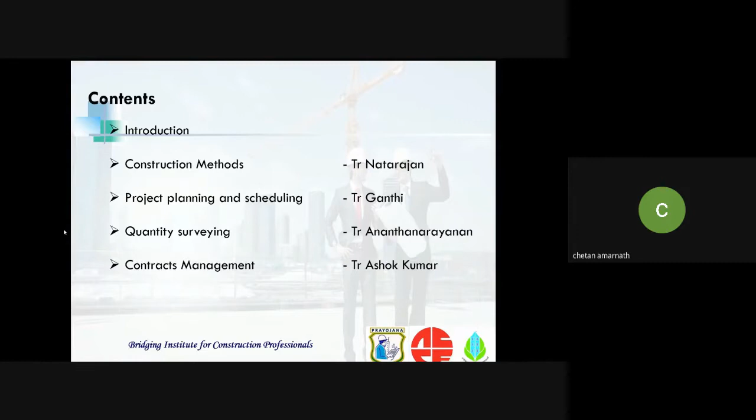And also contracts management, which is often ignored by students because they think it is a quite complicated topic. But our Ashok sir made it very easy for us to understand and apply when we enter into the construction industry.

We also had around 25 webinars, all from people who have experience in the construction industry for a long time. We covered some of the most important and also most ignored topics, from waterproofing, quantity surveying, airport construction, and more. We got a lot to learn from these webinars.

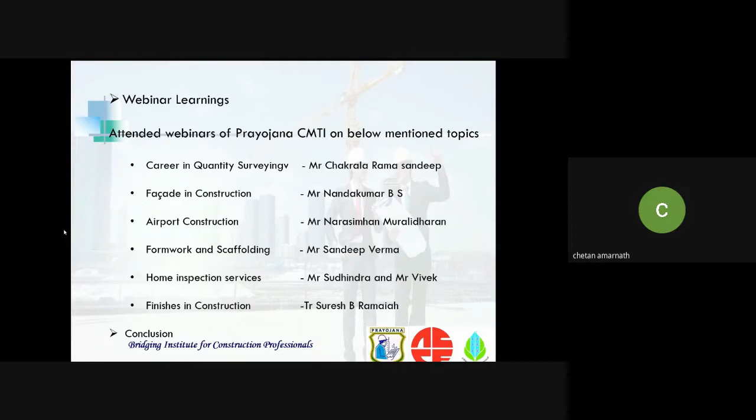So let us start off with the introduction. Construction management is the process of planning, coordinating, monitoring, and controlling of a construction project. This style of project management is especially designed for the construction industry.

So many people ask, why construction management? Why is it so booming in the industry right now? Why are so many people talking about it? Construction management is necessary because it involves all the small details that are often ignored by many people, and those small details make the difference in how successful a project is or how much profit has been made.

All the small details are included in this, right from the schedule, the budget, whether everything is falling according to plan, or if there is any lack in the steps or activities. All these are taken care of by construction management.

Soft skills are also very important for a construction manager, which ensure effective communication between all the teams in a construction project. We know that there are at least 5 to 10 different teams working on a construction site, so there has to be effective communication between each party.

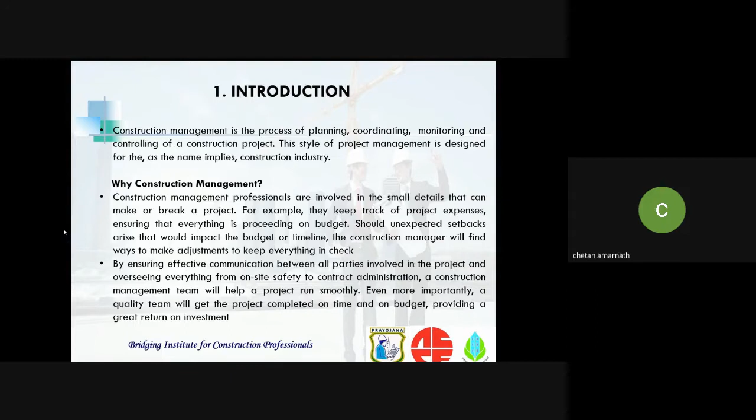If there is any communication gap, it might lead to destroying the work and redoing it again, which is a waste of time and money. So to avoid that, construction managers make sure that communication between all the parties is smooth and up to date.

So, the scope of construction management in India. As we know, India wants to be a $5 trillion economy by 2025. For that to happen, the construction industry has a very important role, because it is one of the most contributing sectors in India, growing by 7 to 8% every year.

It is estimated that by 2025, the size of the construction industry in India will be the third largest in the world, almost 1 trillion US dollars. With this construction industry expanding at such a rapid rate, there is obviously a dire need for better construction managers and project managers who will ensure the project is completed on time within the stipulated resources and budget.

That is why I realized that construction management is so important for every civil engineer to learn, and I got this wonderful opportunity to join Prayojana Construction Management Institute.

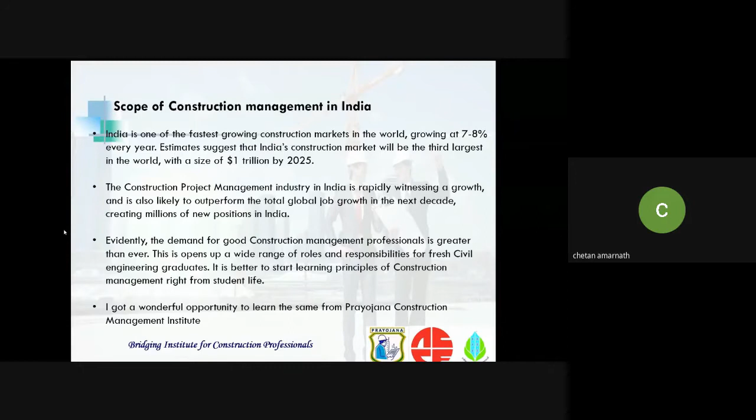So one of the first classes that we started with was construction methods. Even though it says construction manager, it is very important for a construction manager to know all the technical aspects, because construction management is all about balancing between the technical aspects and the management aspects of a project.

So to know the technical aspects, we had these many classes which spoke about the construction steps involved right from pre-construction. Basically, the construction project is divided into three major categories: pre-construction, the actual construction stage, and post-construction. As a student, I never knew there were so many activities involved before the construction of the project.

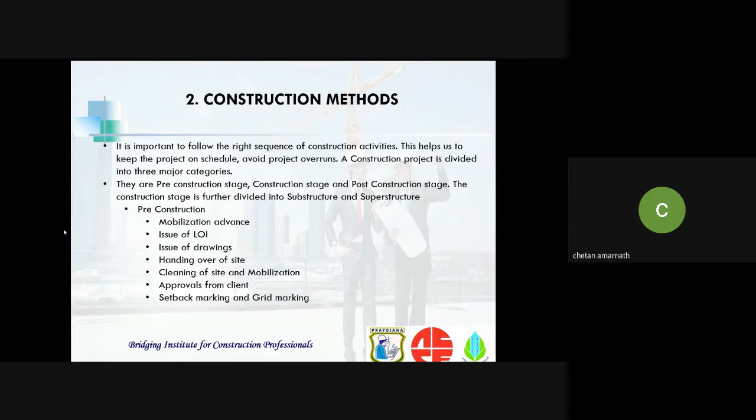Right from mobilization advance, the issue of letter of intent, the drawings, then cleaning of the site, handing over, and marking, and then we move on to the construction stage, where it is further subdivided into substructure and superstructure. Many important activities like excavation, filling, anti-termite treatment, PCC, backfilling, shuttering, and concrete work all happen in the construction stage in the substructure.

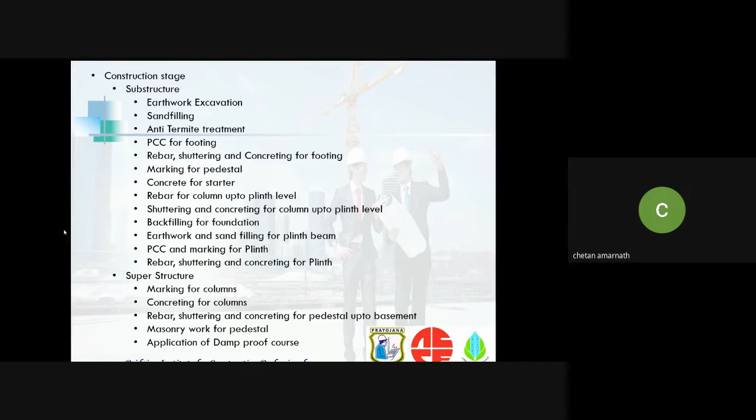Superstructure is almost similar, just that there will be no footing works. We carry on with the columns again, then rebar, shuttering, and concreting for the other RCC elements. Then we put the rebar for the ground floor slab, and we do slab level checks and electrical conduits, all those things.

And then one of the most important parts, which supplements the other construction activities, is the finishing. People who are buying homes don't care if the beam or column is built properly. They only care about the finishing, how good the home looks, how good the project looks. So finishing is the most important part.

It involves the brickwork, plastering, scaffolding, the wall chasing for electrical conduits, the internal wall plastering, and the waterproofing, which makes sure that water does not percolate into the building. So these are all important parts.

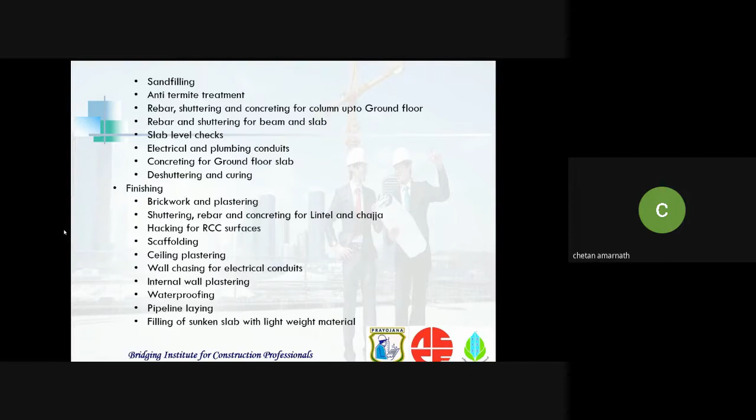Also the flooring and finishes, where we take care of removing the dead mortar, kitchen wall tiling, room floor tiling, all those things. And then external works, which involves electrical pumping, car parking systems, and rainwater harvesting systems, which is compulsory for every project right now. And then the external painting, and then we hand over the site to the client.

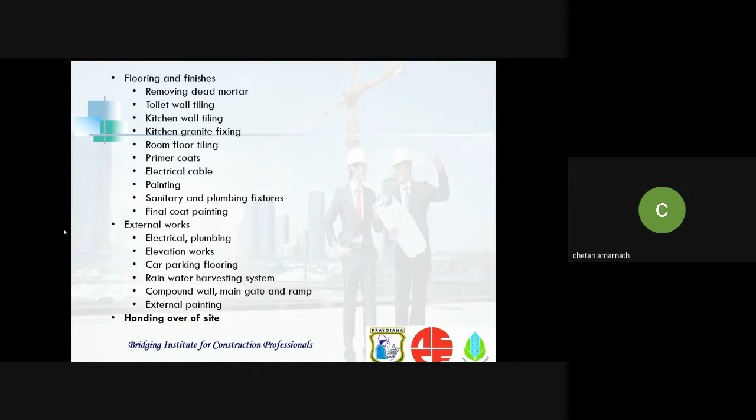So that was a brief introduction about construction steps. There are many more detailed steps involved, which have to be learned in a very extensive way by a construction manager.

Then we learned about project planning and scheduling. This might seem like a very simple and common topic, but the amount of detail involved in project planning and scheduling is immense. Planning is basically defining a process of what we are going to do in the project in a systematic way.

That process will include all the resources that we have, the time that we are going to spend, and the cost which is given, the budget. Planning can be either done manually or by the use of project management software. Basically planning is divided into three parts: time planning, resource planning, and cost planning.

Time planning, it's obvious, involves the timeline where the work or activities are broken down, and it is to be executed in a sequential manner within the given time.

Resource planning deals with the allocation of available resources to the activities, so that it is allocated in the most feasible and productive way, so that no labor is just wandering around the project without any work. They have to be allocated in such a way that everybody is working all the time in the most productive way.

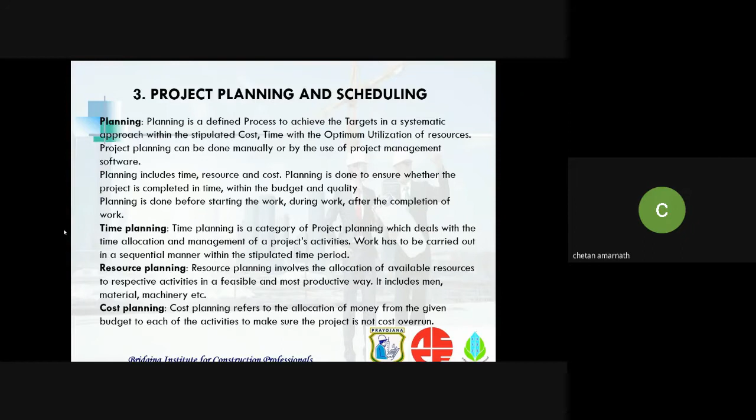The cost planning refers to the allocation of money from the given budget to each of the activities, to make sure that the project is not exceeding the budget and that all activities are taking place within the stipulated cost. So what is the need for project planning?

Project planning ensures that the project is completed with utmost quality, without any errors, without any fault. It also has to be completed within the time. It is not okay if the project is delayed by 2 or 3 years while delivering high quality. Customers don't care about the quality if the project is delayed by 1, 2, or 3 years.

So the project planning ensures that it is with high quality and also within the stipulated time, also within the budget cost. Customers don't prefer spending a lot of money just so they can get a high quality project. It also should be within the budget.

So we move on to the next topic, that is scheduling. Scheduling is a mechanism to communicate what tasks have to be executed, and we allocate the resources and the time frame as well. So scheduling takes care of which task is to be done, when, and within what time. It has a great deal of importance as it takes care of allocation of resources, time, and all those things.

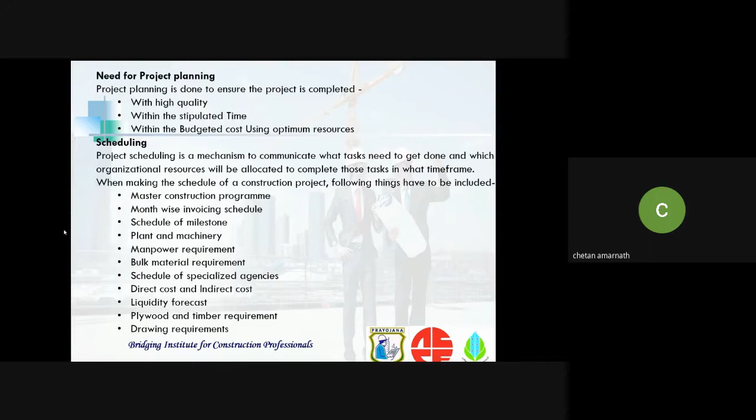So project scheduling is basically most widely done by Microsoft Project. It is a wonderful application, software developed by Microsoft. It is designed to assist a manager in developing a schedule that is used to assign the resources. It is also used to track the progress, manage the budget, and analyze the workloads, everything.

So the basic steps that are to be followed in any project scheduling are given below. We have to first create a project, then we create the project calendar, where we give the work timings, whether it is 5 days a week or 6 days a week, and then all the holidays that we are including in the calendar.

We also give the input of the project information, that is when we are starting, what is the deadline, all those things. Then we modify the time according to our requirements, entering the sequence of activities, then mentioning the predecessors, successors, all those things, then identifying the critical path and the total float/slack. So this is how a typical MS Project schedule would look like.

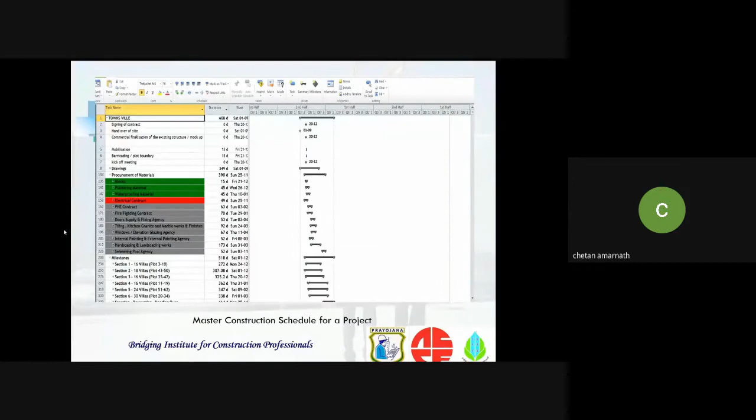So then we move on to the next very important topic, that is quantity surveying. Quantity surveying these days is gaining a lot of importance in the construction industry. It mainly deals with estimation, planning, and control of cost of construction projects. It includes very important topics like value engineering, feasibility studies, cost planning, etc.

The roles of a quantity surveyor are never ending, so the list goes on. The most important and main roles are mentioned here: the estimation of quantities as per the tender drawings, the review of bill of quantities received from consultants, then studying the good-for-construction drawings and preparing the pre-estimation of quantities.

The quantity surveyor is also required to audit the bill, but not to certify the bill. Certification is the responsibility of the respective project teams. Coordination with the project team, procurement team, and coordinator—communication is very important. The quantity surveyor is also required to audit the final bill. So these are some of the responsibilities that a quantity surveyor is assigned with.

So it is safe to say that a person or professional who wants to pursue a career in quantity surveying should be perfect with the bill of quantities, contracts management, then technical aspects such as studying the drawings, and also the latest trends of prices of the material, so that they don't get cheated by these small vendors.

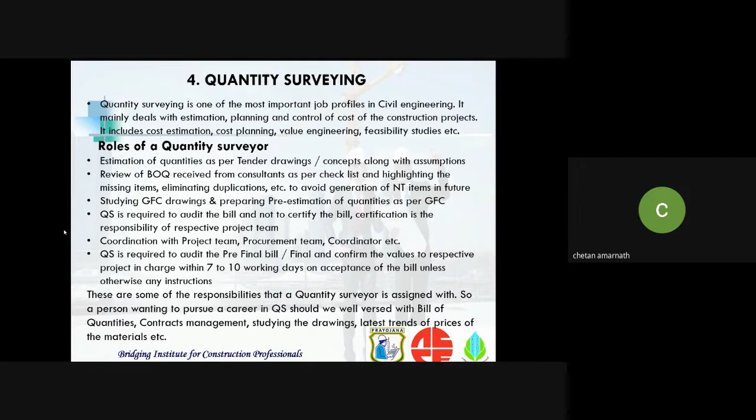So then we move on to contracts management. As I said, many students or budding civil engineers tend to avoid this topic because it seems complicated, but it is very important and an excellent topic to know.

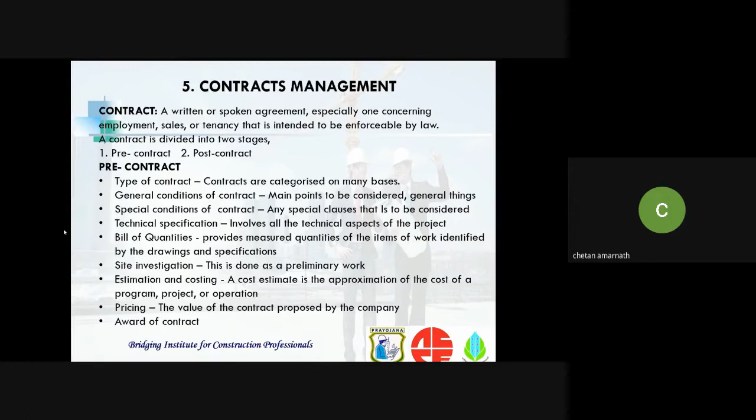A contract is basically divided into two stages, that is pre-contract and post-contract. The pre-contract involves the types of contract, the general conditions that are involved, the main points to be considered, the special conditions, any special clauses that the company should know, the technical specifications, the bill of quantities, site investigation, estimation and costing, and award of contract. So these are all the activities that are involved in pre-contract.

Coming to post-contract, post-contract involves letter of intent, that outlines the understanding between two or more parties, and the letter of acceptance, which is basically a document that is issued after the agreement of the project. Then the work order, which is an order issued for a definite scope of work to be performed, pursuant to a job order contract.

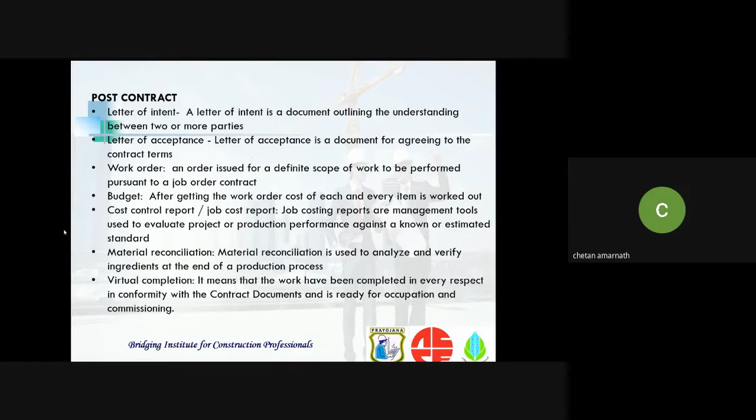So after getting the work order, the cost of each and every item is worked out, and the budget is framed, which is to be followed. And the material reconciliation and the virtual completion. Virtual completion basically means that the work has been completed in every aspect, that is conforming to the contract documents, and it is ready for occupation and commissioning.

So these are all the things that are involved in post contract.

Coming to types of contract, we have many categories or types of contract. The most common or popular type is item rate. An item rate contract is undertaken on a per piece or item basis, where the contractor works and gets paid per item. The quote rate is based on the quantity manufactured or work done by them.

We also have another type called lump sum or fixed rate. It is a type where construction related activities are regulated with a fixed price decided before the project starts. Essentially, if the lump sum contract was signed, it would be very challenging to obtain any credit back for an uncompleted job.

We also have turnkey. A turnkey project is basically where the contractor takes care of everything from starting to end, and the client has to just take the key and turn. That is what the name signifies, turnkey.

We have the opposite of it, which is called non-turnkey, where the job is done according to the client's specifications, whatever they want.

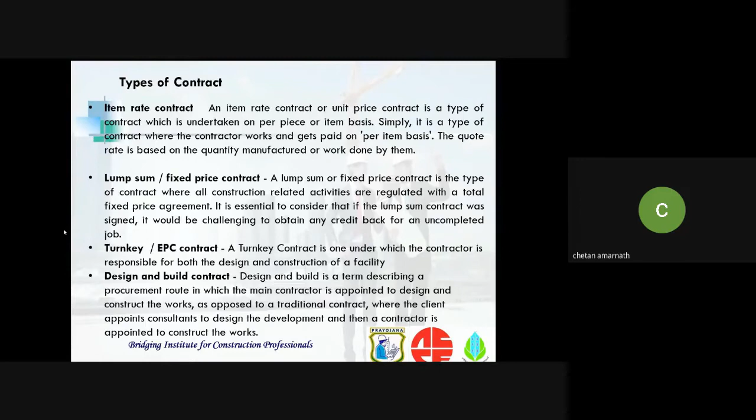We also have another category called cost plus contract. In simple words, it is a contract where the contractor is awarded the money required to finish the job, also including an additional amount which is taken as profit by the contractor.

The general conditions that a contract involves are the notice inviting tender, the submission details, the time duration, the insurance, labor license, basic price, the taxes, and the damage, etc.

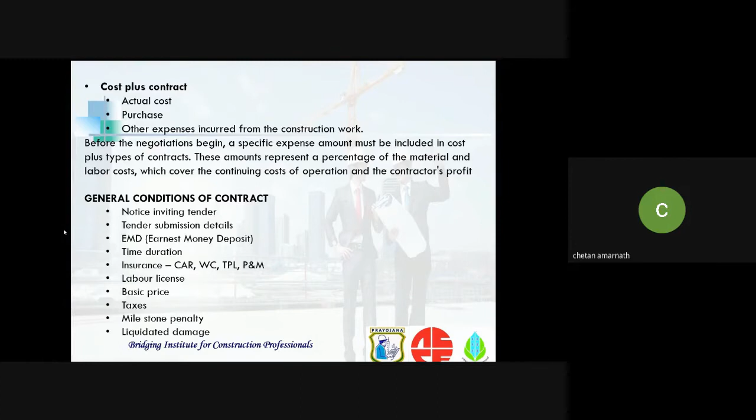So then we move on to the webinar learnings. I think this was one of the most beneficial parts of the short-term course that we did, because we almost got to speak with more than 20 different construction professionals in the industry who have a lot of experience in different fields. We almost had around 25 different webinars.

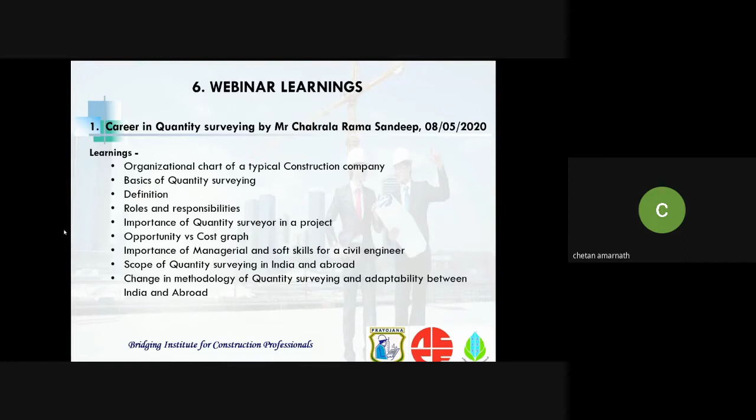The first one was the career in quantity surveying, by Mr. Sandeep sir. He gave an excellent overview about quantity surveying, how the industry is, what are the different roles that a quantity surveyor should have, the scope of quantity surveying in India compared to abroad, and the change in methodology of quantity surveying and adaptability between India and abroad.

He also explained this beautiful graph which talks about how the opportunity varies with cost, or vice versa. In the initial stages of the project, that is basically the planning, where the projects are still being developed and the idea is being generated, you have a lot of opportunity to change or tweak things according to your desire, and it will cost almost zero.

As the project progresses, we move on to the production phase, where we start executing and finishing the project. There, if any change is to be done, the opportunities are very less. If it has to be done by all means, then it means destructive intervention takes place, which obviously leads to increasing cost, since whatever is already done has to be destroyed and rebuilt. That is why the opportunity is very less and the cost is very high.

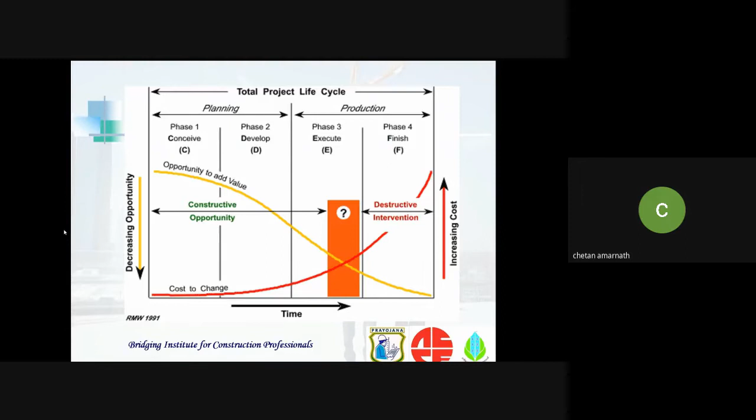So then we move on to the next very important topic in the construction project, that is facade. Facade engineering is considered to be not very popular in India, but it is given a lot of importance abroad. Facade is basically the art and science of dealing with aesthetics, environmental, and structural concepts to achieve complete enclosure of a building.

In simple words, it refers to the exterior of a building. It sets the tone, since whatever people see first, they see the building from the outside. So if the exteriors of a building are not very convincing, then that means the overall project has been let down. The key purposes of facade are to make the structure look architecturally pleasing, to make it look beautiful from the outside.

It provides an outer skin to the building, and it also acts as a physical barrier between the inner conditioned space and the outer unconditioned space. So the most common misconception is that the facade only deals with the exterior looks of a building, which is not true, because facade does actually a lot more than that.

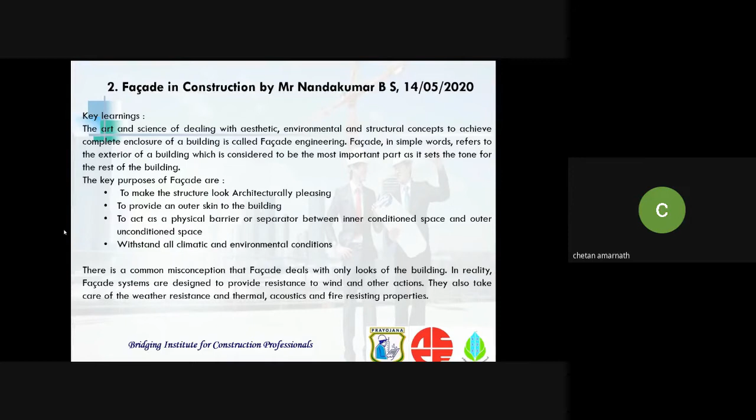It takes care of the HVAC systems. It is responsible to withstand all the climatic and environmental conditions, such as changes in wind, fire, etc. It also takes care of weather resistance and acoustics.

These are the types of facade systems used in modern multi-story buildings: the brickwork or stone masonry, considered one of the oldest facade systems, and the modern systems include glass and steel systems and aesthetic weather-tight veneers.

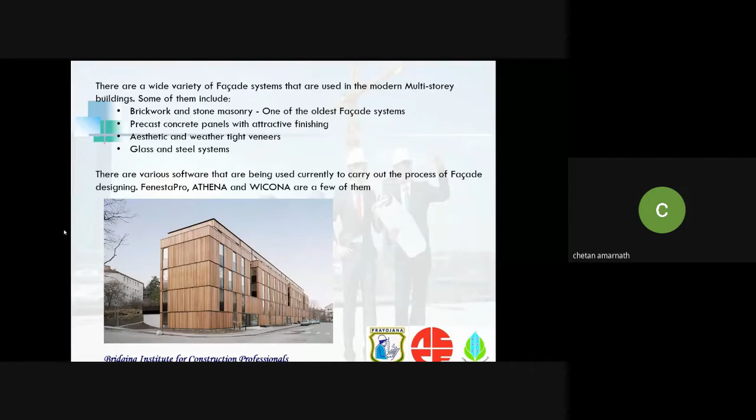There are a lot of softwares used to apply the facade systems, that is FenestaPro, ATHENA, and WICONA. So next we move on to formwork and scaffolding.

This was done by Mr. Sandeep sir. Formwork is basically used as a mold for a structure in which we pour the fresh concrete. The types of concrete formwork depend upon the specifications of the project, and it also depends on the type of structural elements.

A project manager expects the construction to happen in a fast and effective manner, so the type of formwork is very important. The key parameters for selecting a formwork are the number of pours - is it one-time use, or is it supposed to be used multiple times? Also the timeline for how long the project is supposed to go on, the concrete pressure, the site conditions, and the finishing.

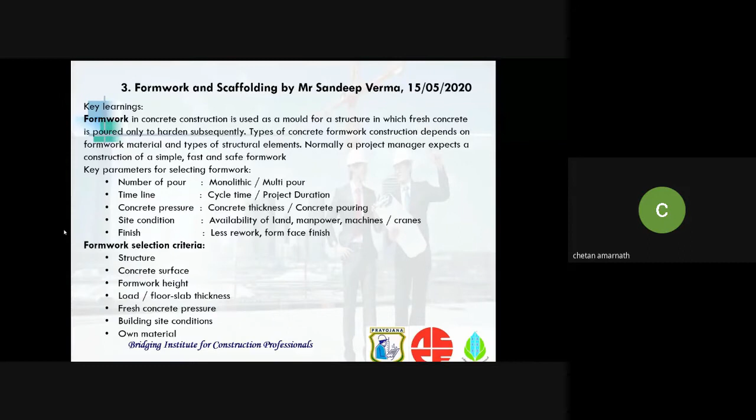Then we move on to scaffolding. Scaffolding is a temporary structure which is built to support the laborers who climb on it to finish the construction works.

We have five main types of scaffolding: the tube and coupler components, the prefabricated modular systems, the H-frame system, the facade modular systems, and also the timber or bamboo scaffolds, which we see widely applied in many residential projects.

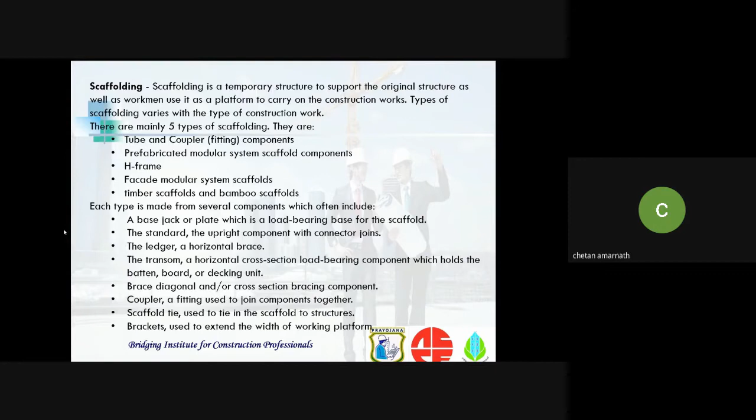Each type is made from several components. We have the base jack or the plates, which is the load bearing base of the scaffold. We have the horizontal brace called a ledger, and also a cross section bracing component. We have a coupler used for fitting the components together, and brackets used to extend the width of the working platform.

Then one of the most interesting webinars we had is on airport construction, which is not at all involved in any syllabus of many universities. So this was a very knowledgeable session for us, which dealt with the many systems and teams that work in an airport to ensure the smooth flowing of passengers.

Airport development parameters: there are many things that have to be analyzed before an airport is built. That is first the number of passengers visiting the airport, also the orientation of the proposed land, and the weather conditions - is it safe to build an airport there, or is there another nearby location with lesser weather changes.

The number of movements per day - how many airlines are at the airport, how many planes are planned to be landing and taking off per day.

Also the number of passenger bags that are expected, because one of the biggest systems in an airport is the baggage handling system. It is very important that the baggage handling system goes smoothly, so that passengers get their respective bags correctly after the flight.

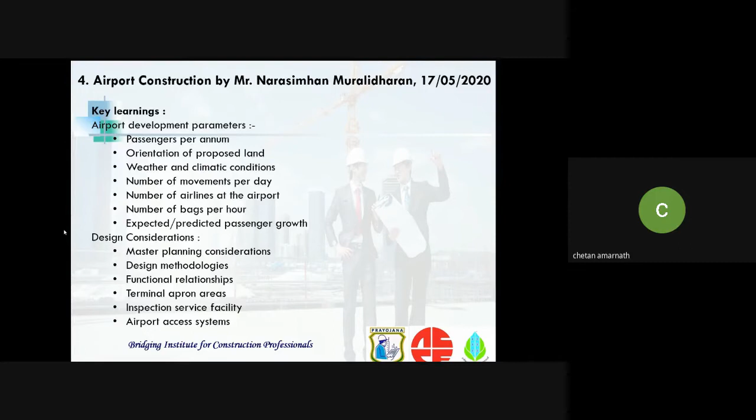Also the predicted passenger growth - in 10, 15, or 20 years, what is the predicted number of passengers that will be using the airport. For design considerations, we have design methodologies, the functional relationships, all the service facilities, etc.

We have basically four operation models: the state-owned airports, the private airports, the government-owned airports, and defense air bases. Defense air bases are maintained by the defense forces of India, and they take care of all the facilities and functions.

The various systems in an airport include the ground power units (GPUs), which take care of the electricity supply to the entire airport, and the fuel hydrant system, which takes care of filling fuel into the aircraft, the gate operating system, and the visual docking guidance system, which shows the pilot where the plane is supposed to go after landing, as well as the baggage handling system and the aeronautical ground lighting.

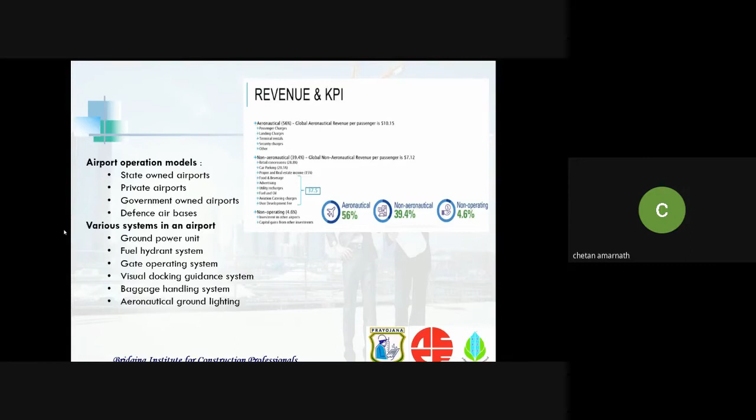These are the lights which are basically fixed on the runways. They help the pilot guide the plane towards the runway to the correct spot.

Then we had home inspection services. This was quite a new topic to us, but very interesting. Home inspection is basically a non-invasive and limited examination of the condition of a built house, and it is connected to the transaction of that home.

It is done after the customer has bought the home, and then the company basically inspects the level of quality of the construction. Presently what is happening in this industry is the checks done before handing over a house to the owner are very basic, so the detailed assessment is ignored.

This leads to frustration for the owner when they face minor problems, which might seem small but are quite irritating. This can be avoided by simply adopting a comprehensive inspection, and that is where home inspection services come into play.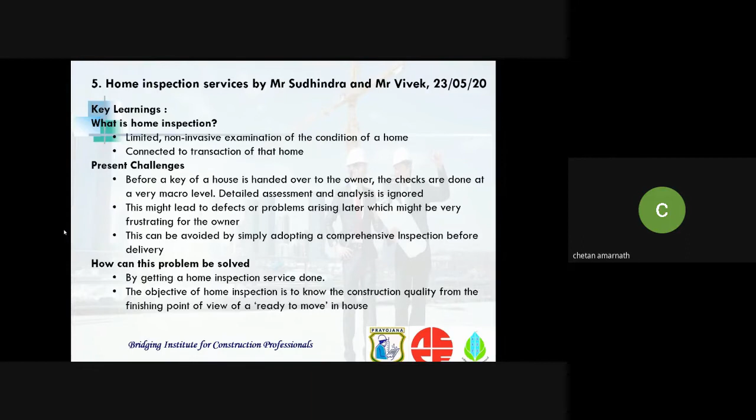The objective of the home inspection is to know the construction quality from the finishing point of view of a ready-to-move-in project, checking if there are any flaws in the construction or the finishing of the house.

The key elements of a home inspection basically involve a home inspector who, after the appointment, visits the location with a checklist and takes care of all the checking, following a predefined set of things that have to be followed.

After the inspection is completed, they issue an inspection report. The report will have all the major flaws which might lead to a problem.

One important thing to note is that home inspection services do not provide a solution to the problems. This makes sense because 10 different people would have 10 different solutions to one single problem. So the home inspection services do not suggest any solution; it is left to the owner to decide how they go about solving the problem.

The market potential in India is very huge after the Real Estate Regulatory Authority came up with a new set of rules and regulations. By 2025, the real estate sector is set to contribute around 13% of the overall country's GDP, and the real estate market is set to grow to around $180 billion by the end of 2020, though this might be hampered a little due to COVID-19. Still, there is a huge opportunity.

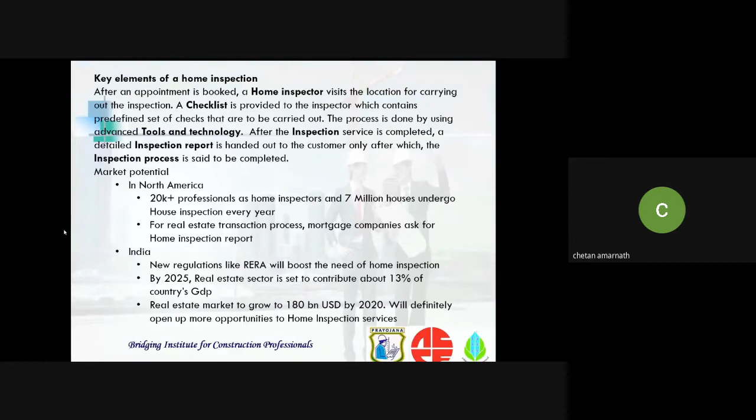Then we had finishing and construction, which was taken care of by Mr. Suresh sir. It was a very huge topic that we learned over around 4 to 5 days.

We learned a lot about masonry and its types, that is, brick masonry, solid block, composite, and granite masonry. We also learned about masonry walls and the different types of bonds involved in brick masonry.

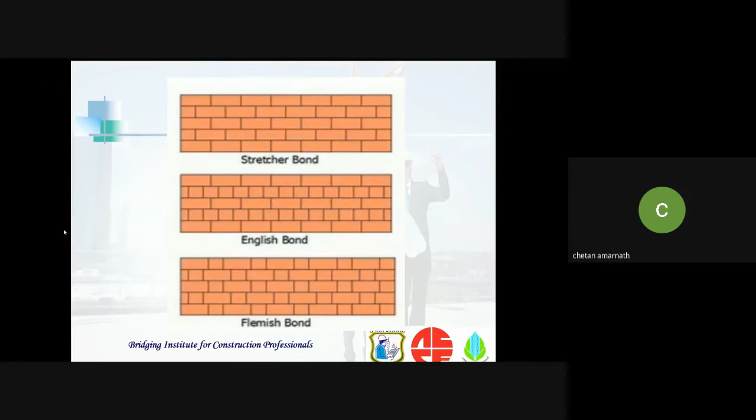Brick masonry is one of the most widespread types used in India. There are four types of bonds: stretcher bond, Flemish, English, and header bond.

We learned about the compressive strengths that a concrete masonry block has to undergo. There is a set of predefined procedures that has to be followed to make sure the block being used is up to the mark, with the minimum compressive strength it should have to avoid any structural failures in the future.

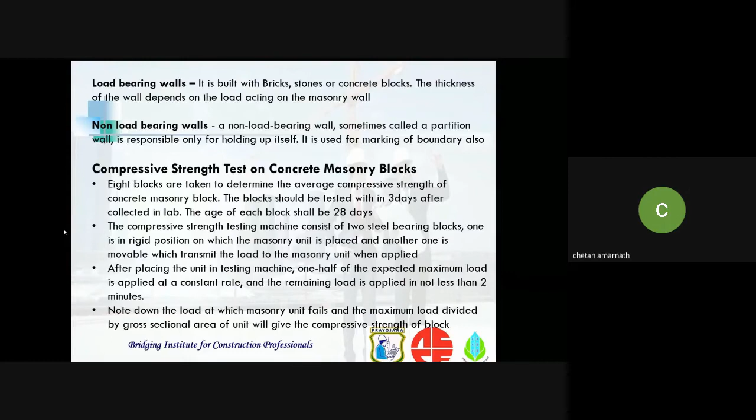We also learned a lot about plastering and its types, that is, lime rendering, gypsum, plain cement, and stucco rough plastering.

The main difference between cement plastering and gypsum plastering is that cement plastering has to be mixed on site, so it takes a lot of time and labor to get it up and running. Whereas gypsum plastering is ready mix, so you just have to get it to the site and start using it.

As I said, cement plastering consumes a lot of time, hence it increases the labor cost. Whereas for gypsum, it saves time as it is already ready mix.

Cement plastering does not provide any fire resistance, whereas gypsum finished surfaces are heat resistant as well as fire resistant. Also, the setting time of cement varies from 60 to 160 minutes, almost 2.5 to 3 hours.

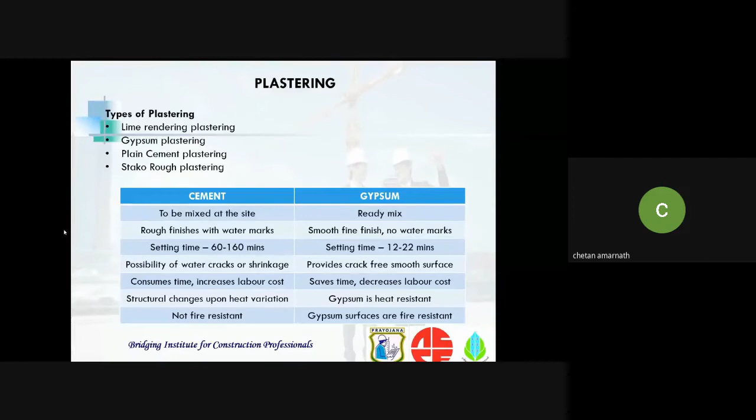But for gypsum, the maximum setting time is 12 to 22 minutes, and the plastering is finished and set.

So we save a lot of time by using gypsum plastering. Then we move on to flooring, where we learned about the different types of flooring, that is laminate wooden flooring, hardwood, mosaic flooring, tile flooring, etc.

Also the procedure of fixing tiles - the tiles have to be soaked for at least half an hour before the start of work, and then we place the cement mortar, and then the batch number and the tile arrow is checked to see if we are using the correct tile or not.

Then the cement slurry has to be laid over the mortar area, and then we place the tile into position, and carry on the tile tapping using a wooden rammer, so that we don't destroy the tiles as a whole. So flooring was a very vast topic.

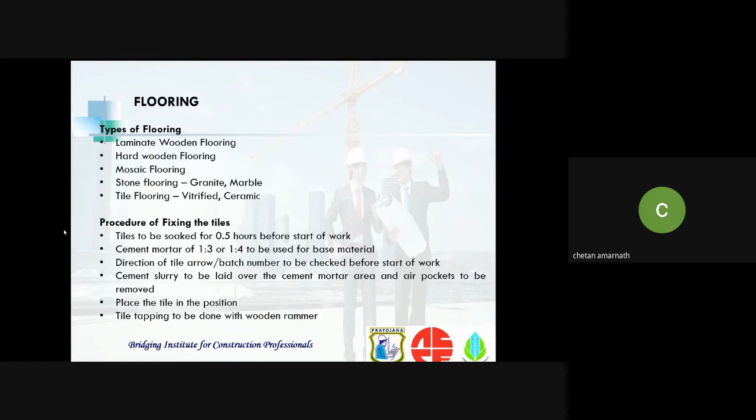The finishes in construction was a very vast topic. We also learned about doors, with different types of doors used in a construction project, also windows, locking systems, etc. As a whole, we learned a lot from the webinars, around 25 webinars.

To conclude about this whole course, it was a major upskill for me as a third year civil engineering student. Almost 90 to 95% of what we learned in this short term course, we never learned in the last 3 years of our BTech program.

This is one of the most important problems engineering colleges face these days - they are not updated to industry requirements. This is where the gap is being built, that the industry requires certain skills that are not being met by graduates from engineering colleges. So this is where Prayojana Construction Management is being very helpful for a student, where they teach everything a student should know as soon as they enter the industry.

So we students are very thankful to Mr. Ashok Kumar sir, and all the different trainers who took out time in their busy schedule to teach us in a very extensive manner. They solved all of our doubts right then and there. All the sessions were very interactive and very knowledgeable.

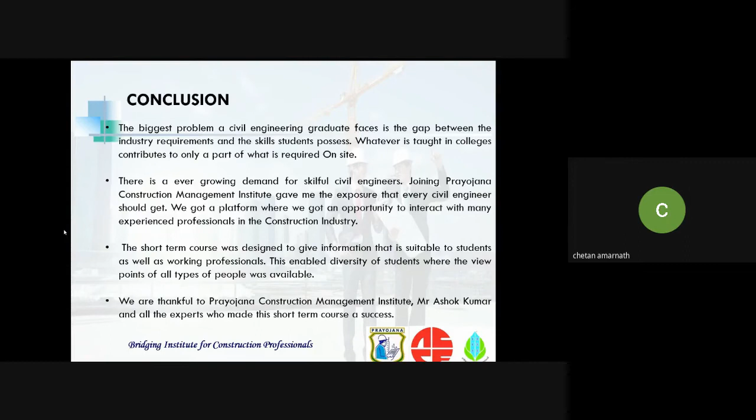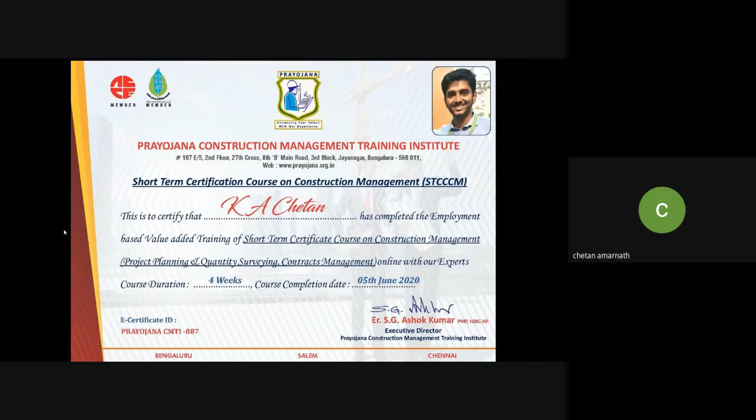6 months ago I was very scared, wondering what I would do after joining the job. But now I am very excited to join my professional life, where I'll be able to apply all the things I've learned in this very short 4 weeks of stay. I would like to thank everybody who made this course a success and gave us the opportunity to learn so many things. Thank you, sir.

Thank you, thank you, excellent presentation. You have utilized the course fully, more than 100%, I can say. You have taken all the content more than that, because in training, students usually just take a bit of notes and the application is a bit less. But in your case, we are very much happy.